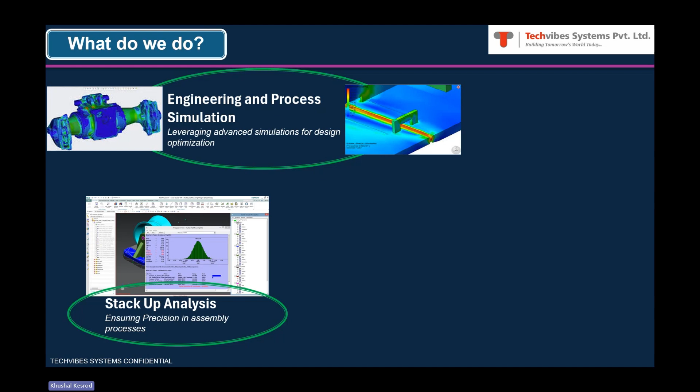And the third area in which we work is production process optimization. The first two things, engineering and then tolerance stack-up analysis, that's validation of an assembly. After it is done, once you realize the parts and assemblies, we just want to check from a quality control standpoint, part wise or maybe assembly process wise. So for that, we have a couple of hardwares and a software which address these requirements.

So a quality management system, under which we have not only hardware and software for measurement and collating data, but to even get a statistical process control document, which can basically help us understand where our processes stand.

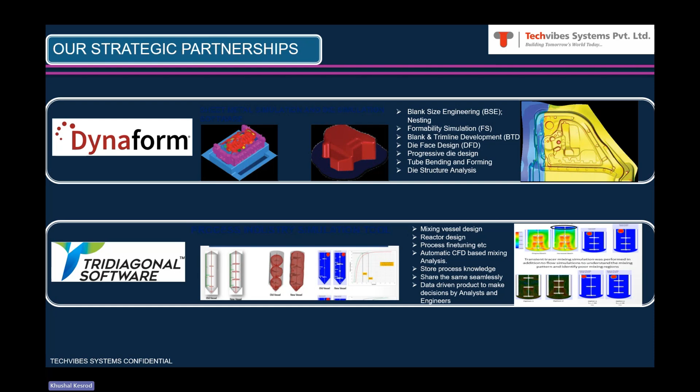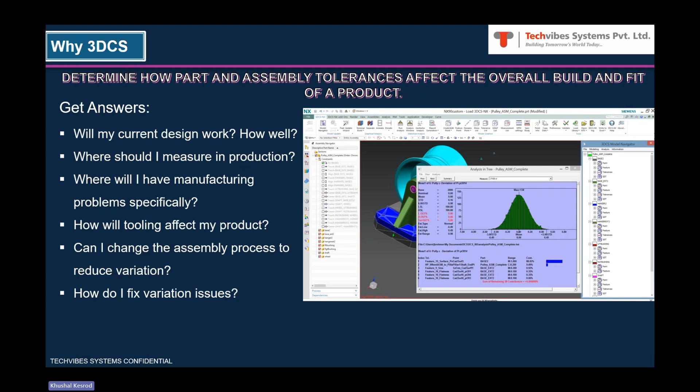All right. So 3DCS is CAD-based tolerance and process analysis software, which can be integrated into any of your CAD platforms like CATIA, Siemens NX, PTC Creo, SolidWorks, and so on. In case you don't want to use 3DCS within any of these CAD platforms, we have a CAD-neutral standalone version called 3DCS MultiCAD. Because I don't have any CAD platform available on my laptop, the demonstration that I'm going to do is on MultiCAD only.

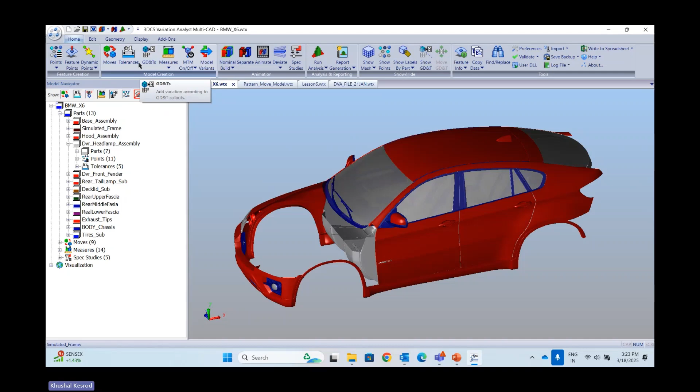Once that import is done, in order to build your model for doing tolerance stack analysis, you are only supposed to define some of the things like moves, that is nothing but assembly relations, tolerance and GD&T, and measurement. Measurement is the measurement that I showed you earlier, right? The gap between turn lamp and headlamp is the measurement requirement. So once these three things are done, your problem is ready to solve. So pretty few things only. This is just to define your problem.

And if you look at GD&Ts that we generally follow, you can see almost all the types of GD&Ts that we generally use. One minute. Okay. So you can have a look at the different types of GD&Ts that you're allowed to give here. I'll probably use some other model so that my system does not get slowed down. Okay. So you're able to define datum, size tolerance, position tolerance, surface profile, flatness, perpendicularity, as per ASME, all these GD&Ts that people apply.

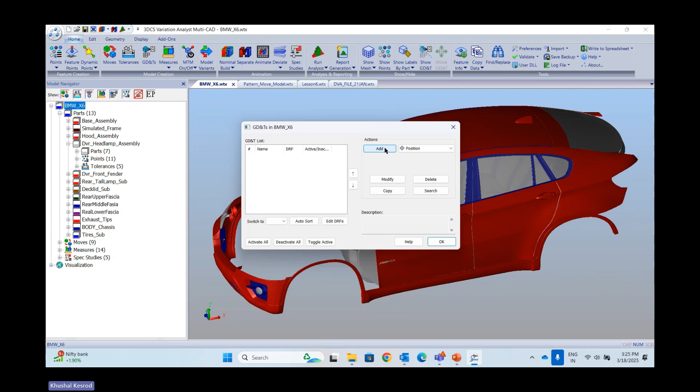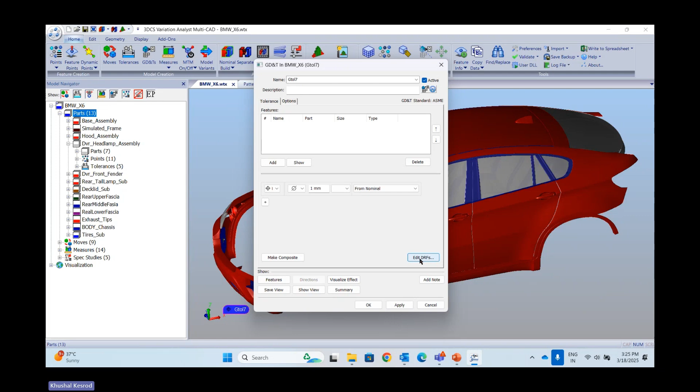Now, typically, if you get in any of the tolerances, let's say position tolerance, since I had selected the topmost assembly, it is taking much more time. So anyway, we just need to mention the feature, mention what is the tolerance level. If you have minimum material condition or maximum material condition, you can mention that, and you can mention the datum frame, like ABC or AB, whatever number of datums you want to define for that particular frame. To explain these things, I'll be in a simpler one so that it takes less time. So these are the things that you will be able to define.

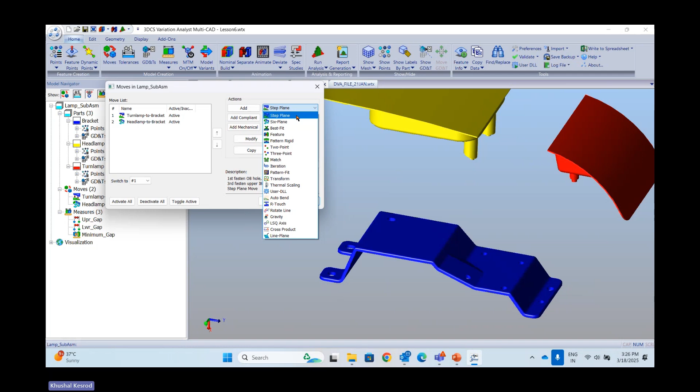Again, when I say move, that means the relation between the components, right? For example, in this particular assembly, these are the flat surfaces of the pin which go on the flat surface of the bracket. That is the primary relation. Then these cylindrical pins go in the holes on the bracket. That's how the assembly is happening. So there are different types of assembly methods. Most of them, which are very frequently used, define our assembly based on the 3-2-1 principle. I'm sure you must be aware of that. What it means is the first relation helps us lock 3 degrees of freedom, then 2, and then 1, so that the assembly is fully constrained, kind of.

Okay, so that is how the assembly relations are given, and then you can define measurement. For example, you have the facility to define point-to-point measurement, surface-to-surface measurement. You can as well define any point location, to understand how much it is varying, and so on. Angle, clearance between pin and hole, all sorts of measurements can be defined.

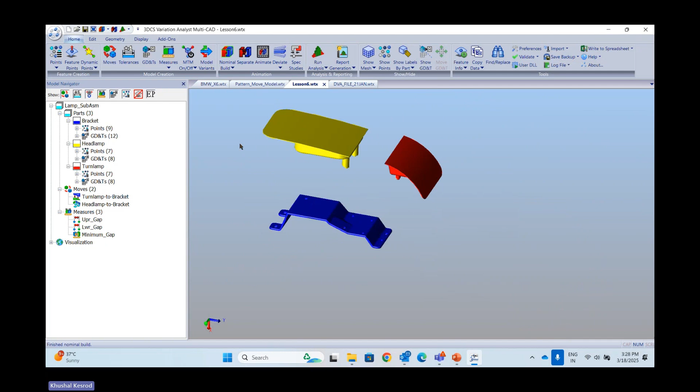Once it is done, this is just a visualization tool. For example, my nominal build assembly, after I define the relations, this is how it is getting defined. But in case of a very large assembly, you would also want to understand if the assembly sequence is appropriately happening. So you can animate and see how those assemblies are actually going to take place. Yeah. So this is just to animate that.

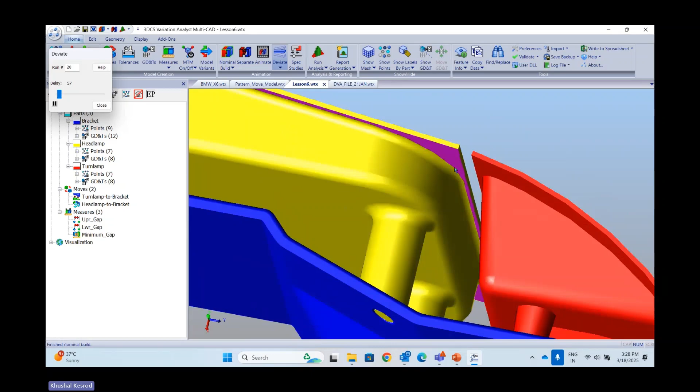And now once assembly is done, I have a choice to see how my components are behaving, how the assembly is behaving. This is just based on whatever clearances you have in the assembly relations, and whatever tolerances, for example, position tolerance of this hole and pin, profile tolerance of all these surfaces, and so on, based on which it can show you the tentative variation that can happen. However, the detailed variation can be calculated later.

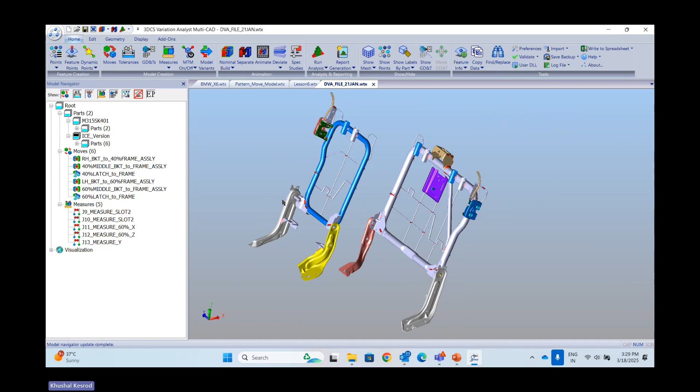Now, I'll quickly show you an example where you may require only a single assembly, but you need that assembly for different configurations. For example, this is not the right example, it is just a rear seat. But for a front seat, you will have a configuration of the seat when it is straight, or maybe reclined by 30 degrees, or reclined by 15 degrees, or something like that. So you don't have to build multiple assemblies in that case. That is where the model variants facility is there. So you can have a single assembly. You don't have to define all tolerances and GD&T in every configuration of the assembly.

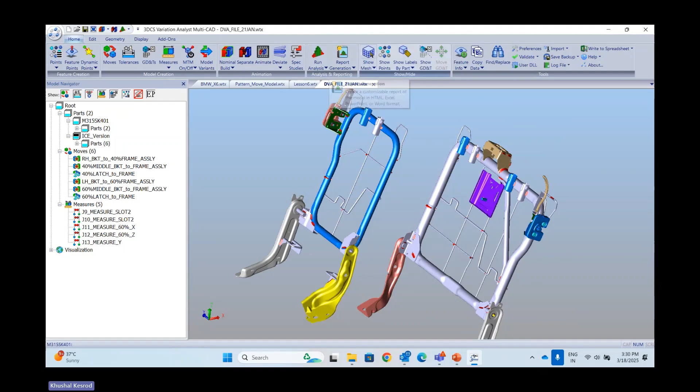You can simply create those model variants here. So that is how it is made to handle many different types of situations that we mechanical engineers face during the assembly. Okay. Now, once it is done, it is simply to solve it.

When it comes to the solver, it is Monte Carlo analysis, which 3DCS does. That essentially is a very well-known algorithm for handling a lot of permutations and combinations. For example, when I mention number of builds here, maybe 2000, 5000, or whatever number you want, it means that for every tolerance you are defining, it can make samples and permutations and combinations of those components, so it can make 5000 samples of this particular assembly. That's what it means, right?

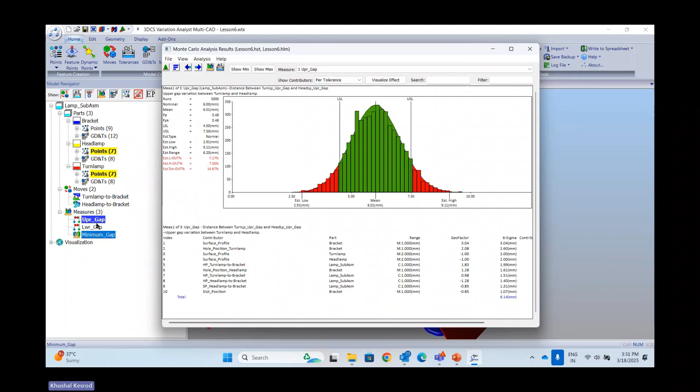So let's say if I just quickly solve it. You understand that these are the three measurements that we have asked for, and you can go ahead and start checking how my assembly is behaving when it comes to upper gap. So let us understand where that upper gap is. Okay, here. This is where the first measurement is. Okay. So what it shows now. Obviously, the nominal was 6 mm.

You were saying, the limit that is given on the lower side was 4.5 mm and the upper side was 7.5 mm. That's what it is showing. And here is the estimated one. So how low can it go when it comes to that particular gap? 2.9 is the lowest it can calculate. 9 point... I'm so sorry, 1 minute. 9.11 is the highest the gap can go, right? So what is the total variation? The difference between both of them is 6.2.

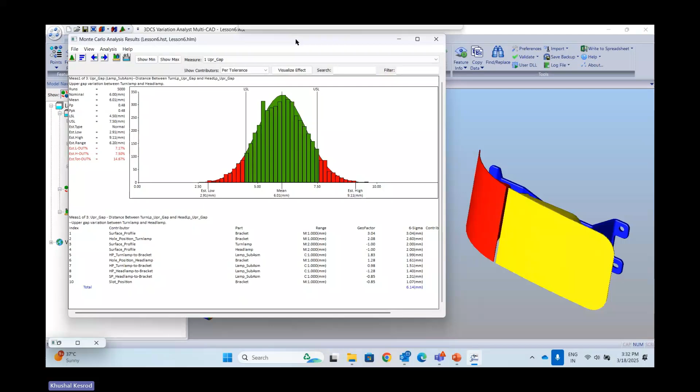And what is the percentage of samples which may go out of spec? So these are the specification limits. On the upper side, what percentage of samples is going out? On the lower side, what percentage of samples is actually going out of spec? So that is what it is showing. Now, whatever the number of samples going out of spec, what is the reason behind that? That is nothing but the contributor. So it is suggesting to us, okay, this is the topmost contributor.

It also says that surface profile belongs to the bracket. If I simply open this and show you what that particular tolerance is, that is essentially a surface profile of the bracket, which is the topmost contributor. Then it says hole position on the bracket is the second contributor. Then surface profile on the measurement surface. Yeah, the measurement surface here. So that is the third level of contributor and so on. So it suggests the sequence of contribution and the percentage of contribution happening because of that particular tolerance.

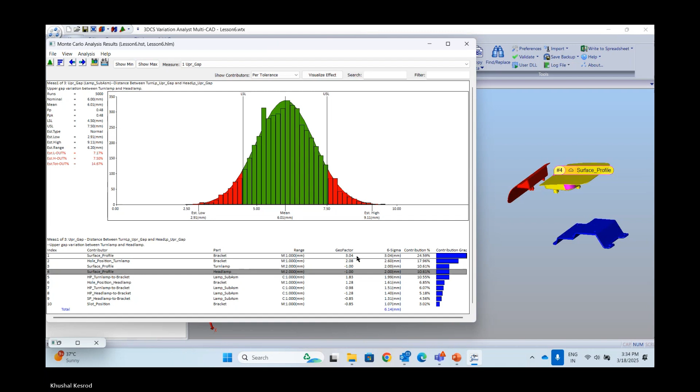Also, it shows you geofactor. Geofactor is nothing but sensitivity: how sensitive this particular measurement is to a given tolerance. For example, the upper gap measurement is 3 times sensitive to any variation happening on the surface profile. If this profile changes by 1 unit, whatever it is, 0.1 mm or whatever, the gap can change by, let's say, 3 times that variation. So that is what geofactor is, geometrical factor. Now, if this geofactor is too high, what could be the reason?

Whether my four-way locator or two-way locators are appropriately placed, or it may so happen that you

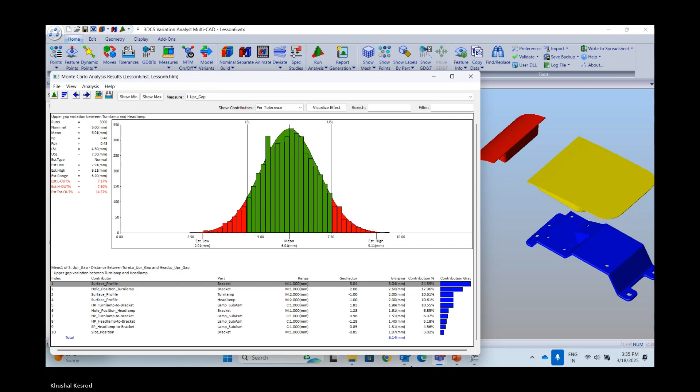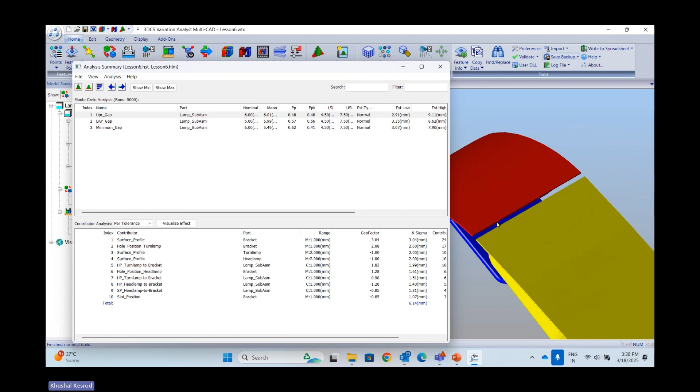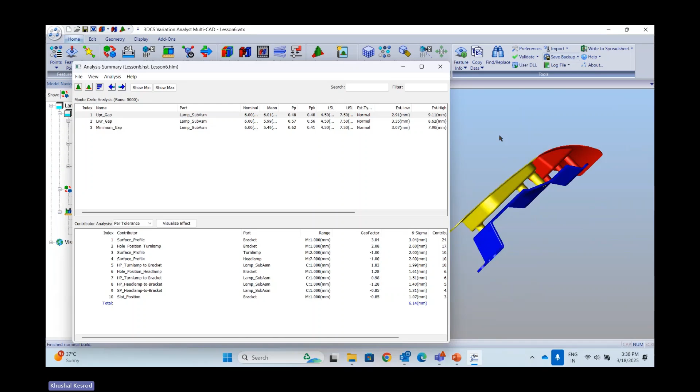now if I'm measuring over here, that is my measurement location. That is the top gap here, and my four-way locator, let's say, is very far away here. Assume that's not the right strategy, isn't it? If you want to maintain a proper gap here, this could be the best locator, so that immediately near the measurement itself, you are locating it appropriately. If this is your area of interest, then why put your four-way locator away from it? Something like that. So that is the kind of insight you get out of this result.

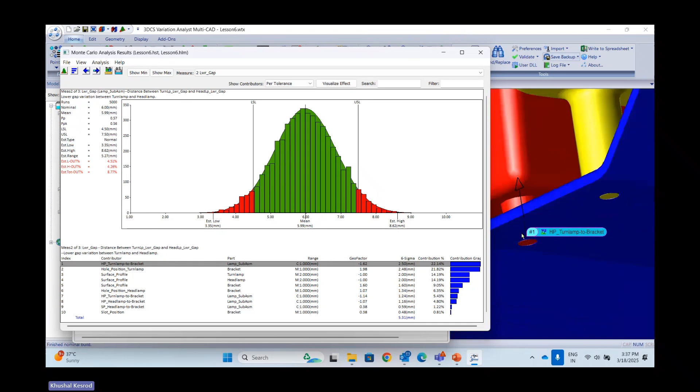Now for the lower gap, again it will list the contributors and their percentage contribution. Here, C stands for clearance, HP is hole pin. So this particular contributor comes from a hole pin relation of the turn lamp and bracket here. So that clearance is becoming a top level contributor, right?

Now, for example, here you observe around 7.5% and 7.17% of samples are actually going out of the spec. Now understand that the surface profile given is one range.

Let me just go ahead and make that a 0.5. Just experimenting, nothing else. Obviously, you will always have a choice how much you can go down based on the manufacturing process that you follow. So that's a different thing. Here, just for the sake of changing, I'm changing this value and quickly rerunning it again after making that range

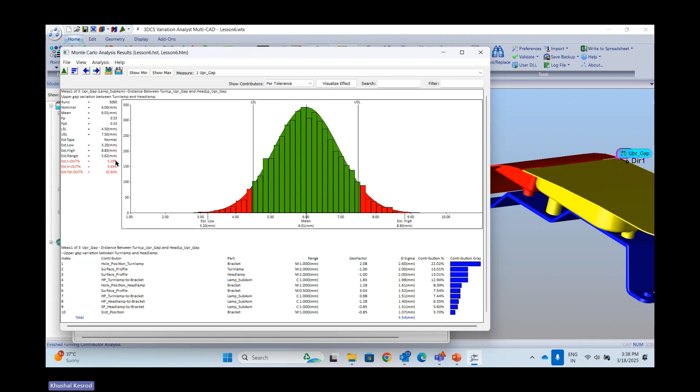to 0.5. Now, first observation: the samples going out of this spec has reduced drastically from 7.5 to around 5.2. And the surface profile of the bracket, which was contributing as the topmost contributor, is now coming at around the sixth location. So some other parameters became bigger contributors than that, right?

So that is the kind of what-if studies you will be able to carry out. Now once your analysis is done, you can automatically extract reports, generate them in HTML, Excel, PPT, or Word format. You can generate in any format, but HTML is my favorite one. I'll just create that.

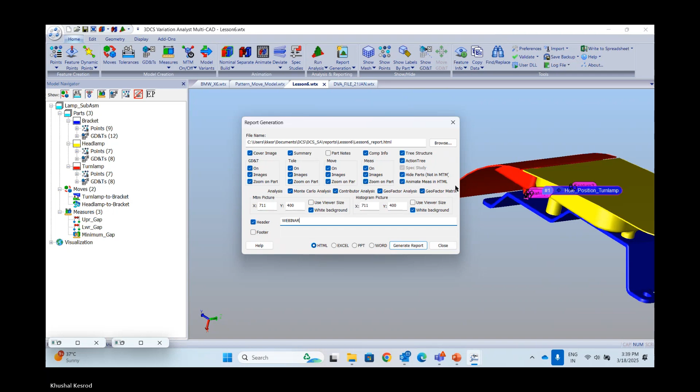One minute, let me just put it properly so it captures the image that is actually appearing on the screen whenever you do those things, right? So let me generate the report. You can always choose what to take and what not to take in the report - that's always the user's choice. And it nicely brings up the report.

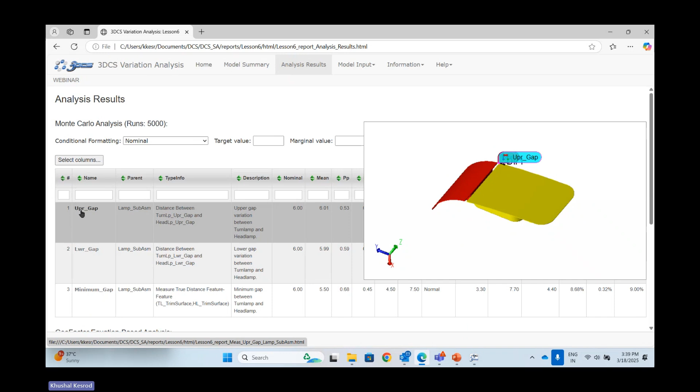If you have a model summary, it will automatically appear here as to what your model is, the reason behind solving this particular problem, and so on. You can mention that, and this is the analysis region. So we have only done it for three measurements. Where that particular measurement is, when you hover the mouse, it automatically brings up the picture - lower gap, minimum gap, and so on. If you want to see details, you can click on it.

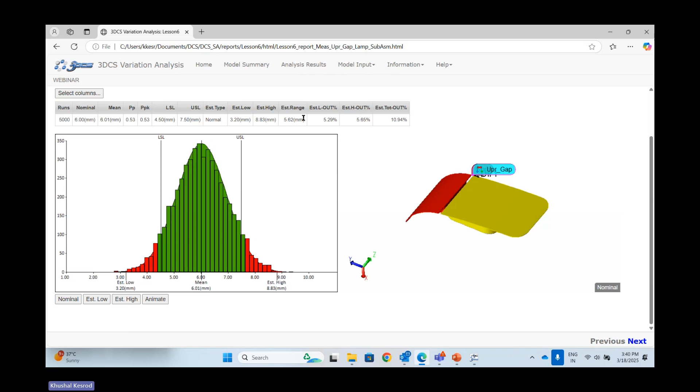You see the normal distribution with whatever percentage is out of the spec. Then you can go ahead and see contributor analysis, which will list down the contributors. And when you click on any contributor, it can show you what that particular contributor means and where that particular feature is.

Surface profile - yeah, this is what it is showing you. This is the second contributor, so you can see that in detail, right? And everything is actually linked with each other.

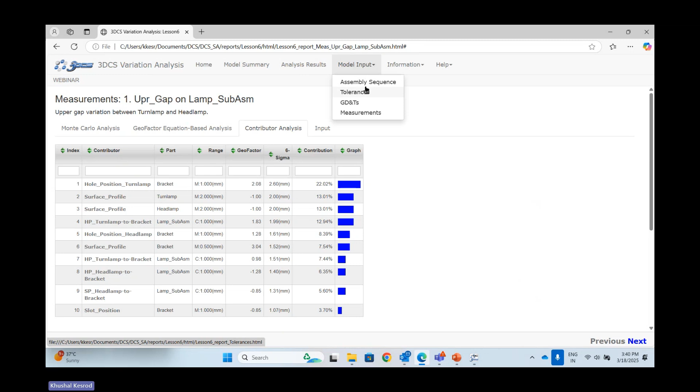Then, what was my complete model input, like the assembly sequence? What was the assembly sequence, in the sense, the moves that we have defined - Turnlamp to bracket, headlamp to bracket.

Then even the measurements - there are only three measurements, but you can see where those measurements are. All this you will be able to get in the report.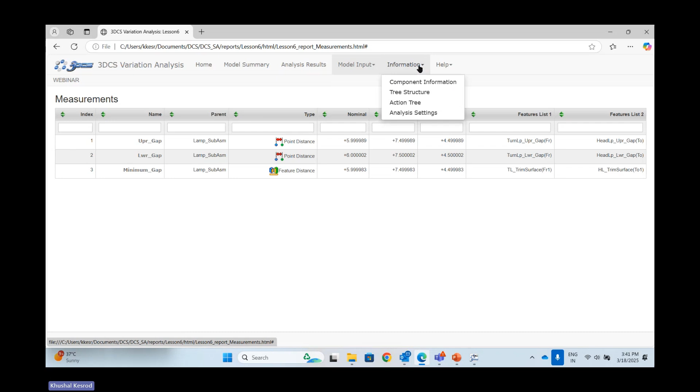As well, you can get complete component information - which components you had, how many components, how many points there were. Complete summary of the model you get here. You get a tree structure - this is pretty small here, but otherwise if it's a large model, it's very important to see the actions tree in terms of GD&Ts, datum and size tolerance, and component-wise, every component you can get in tabulated format.

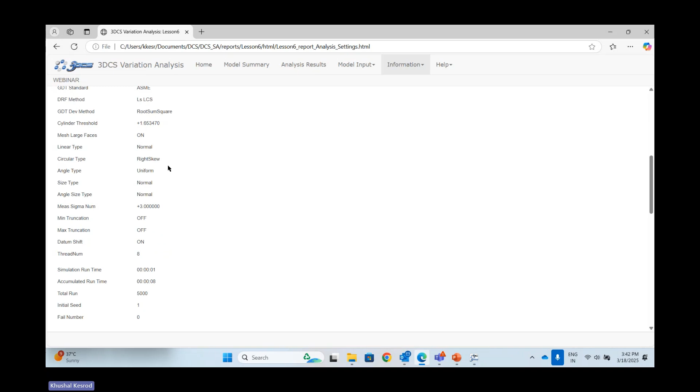And finally the analysis setting, where your input file was, what the summary was in terms of number of parts, GD&Ts, and so on, and all other solver details. It also provides complete simulation analysis settings, so you get a complete summary here - when it was solved, where the file was saved, and so on. So you get the complete thing in the report.

So you actually get a very detailed report in any format that you choose. HTML basically has everything linked, so that's the format I use.

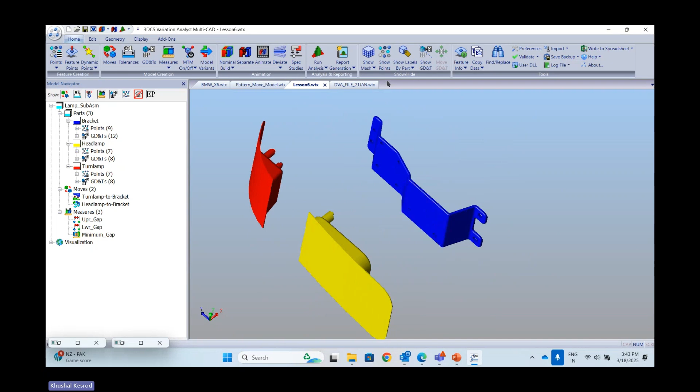Now, before I solve, I would have already defined the measurements and GD&Ts and all. I can actually view them component-wise, even when simply hovering the mouse or clicking on it. For example, this particular profile tolerance - see, it is applied on these many surfaces. Position tolerance is actually applied on these pins - holes, sorry, holes.

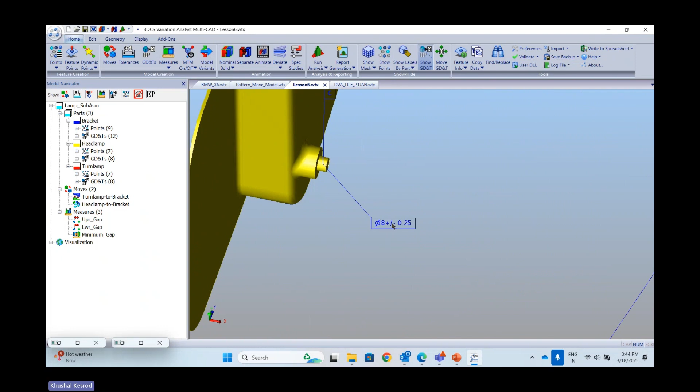So the moment you hover the mouse onto it, it can automatically highlight where this datum is applied - to this hole, size tolerance is applied to this hole. This particular pin, the size tolerance is applied, and position tolerance is applied. So that is how it is when it comes to validating the model.

Hey, hi Khushal, Yogesh here. Sorry to disturb you, maybe you've been talking for some time now. I would like to ask the audience if there are any questions, or if there's anything you would like to see again. Just to make maybe a half a minute or a minute break. Yeah, okay.

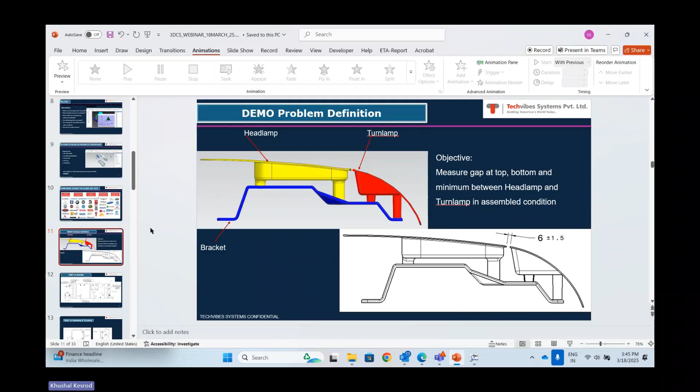So this was one of the demo examples that I wanted to show you. Obviously, these were the GD&Ts that were defined on the model.

Mr. Nrupat Yadav has raised a hand. Just a moment, let me unmute you. Hi, I'm Khushal. Hello sir, can you hear me? Yes, I can hear you. Khushal, there was a mock drill so I joined late, can you quickly brief me from the start, what you want to understand?

In short, this is how we can use it, which software it is compatible with. Okay, perfect, I hope so. No problem, but please, I'll just borrow a couple of minutes from other participants and quickly brief you.

So this is basically a dedicated tolerance stack-up analysis solution. It can get onto any of your CAD platforms like CATIA, Siemens NX, PTC Creo, SolidWorks, and so on. It also has a CAD-neutral standalone version, which is what I am actually using when doing the demo. So it fits equally well into any CAD environment, and beyond.

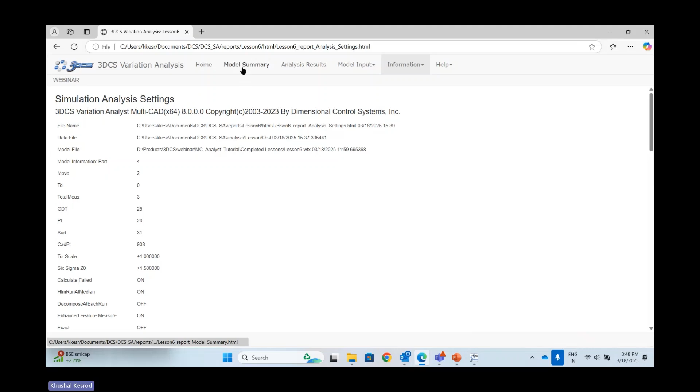Hope you got a glimpse of it, right sir? Yeah, right, okay, in the interest of time, otherwise you can reconnect with us anytime, sir, we can have a detailed discussion. Okay, all right, of course.

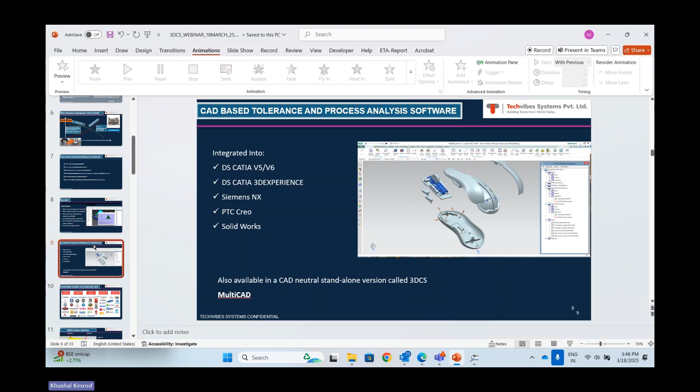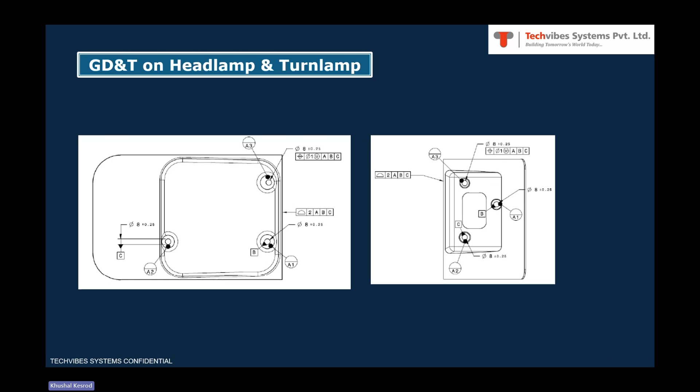Not only GD&Ts and tolerances, but you will be in a position to use even the constraints that you have given in the assembly. I will just quickly show you an example.

Anyway, before that, you have already seen the typical output that 3DCS provides. It does Monte Carlo simulation. It provides quality metrics like PPK, CPK values, which make you understand where your process stands, and key contributors, by which we understand which GD&T and tolerance are contributing to variation.

Looking at percentage out of spec, you can decide whether it's an acceptable percentage or not, depending on the assembly you deal with. What is the total range of variation it's showing? If it's acceptable, it's okay. If not, what needs to be done based on contributors and their sensitivity? You can do a what-if study. Geofactor is nothing but sensitivity, in simpler language—how much the part geometry contributes to the product's variation is what geofactor means.

I'll quickly show you a demo in NX. This is the NX environment in which a simple assembly is imported. When imported, you can see the tree in 3DCS is simple—they are only parts, so there's no tolerance, no moves. You can see on top the same set of icons you saw in multi-CAD. These are the parts in the assembly.

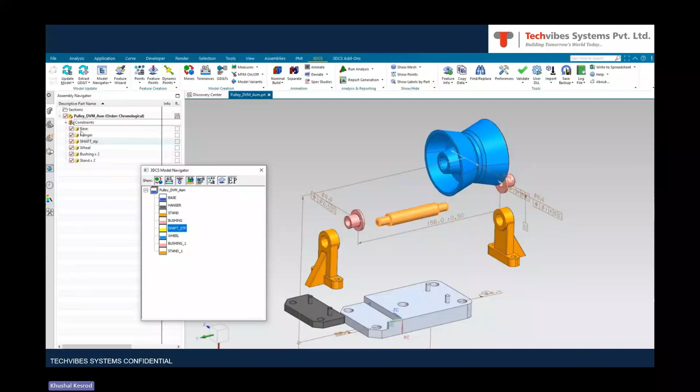If you look at the screen, you have all the GD&Ts and tolerances defined in the NX model. I've expanded the tree and shown you this is how it is. Every individual component also—if you go into the component level and see, yes, all the GD&Ts are actually defined. So here it's very simple.

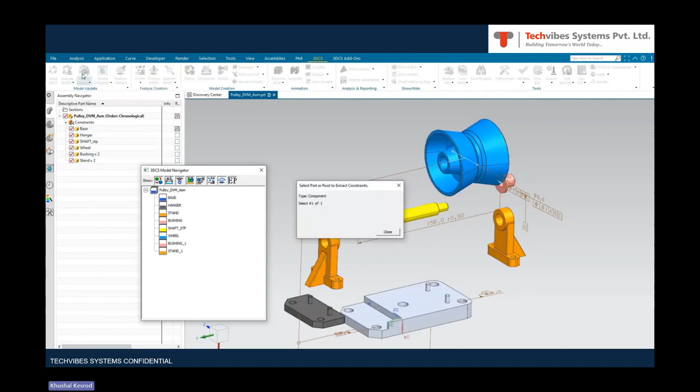We can update the model once before bringing in all the PMIs defined in the NX environment. Here—extract GD&T, can you see extract GD&T? Let me update the model first, and I'll say extract GD&T for all components. I'm choosing top level and said okay. No, this is not extracting GD&T—this is basically defining the moves. So relations defined at the assembly level, like mating, hole-to-hole axis alignment, and so on, it brings that as a move. However, you can always make changes to those moves later. You can see the animation of how moves are getting defined.

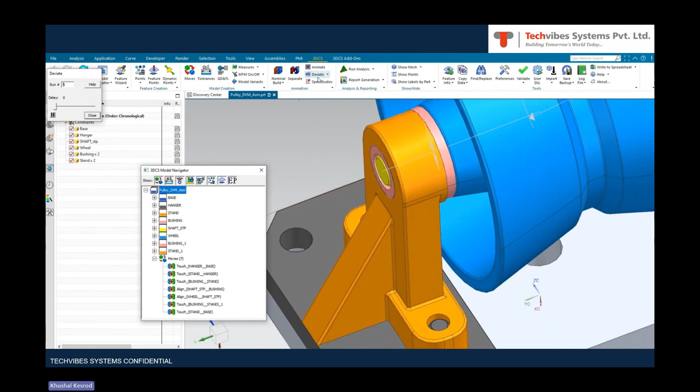The bush and the bracket got onto the base, and this is the complete assembly that is made. Now, as I explained, move, GD&T, and measurement—out of which move is already defined. Let me fast forward in the interest of time. Here we'd like to extract the GD&Ts automatically from the PMIs defined. If you expand any component, let me sort them automatically so datum, size tolerance, and all other tolerance types come in sequence properly—A datum, B datum.

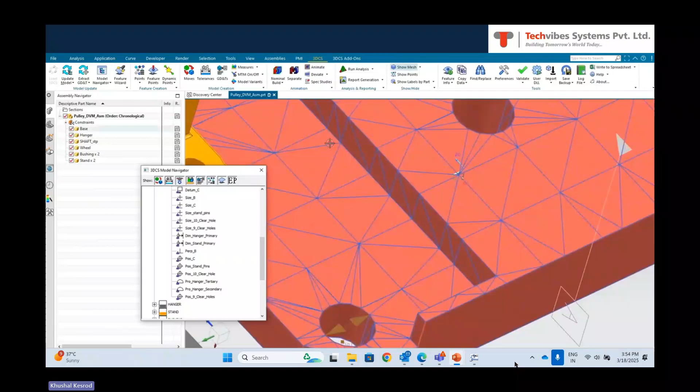This process has extracted the GD&Ts from PMIs defined in the model. Now that the GD&Ts are defined, you can see a profile tolerance applied on this particular surface. Let's see the variation at the surface level. Because of the profile tolerance defined here, the surface is varying—to visualize that, I've made the mesh on. After defining the relation between parts and the tolerances, this is the tentative variation—the model basically breathes, this is how it's breathing. And then you can solve it.

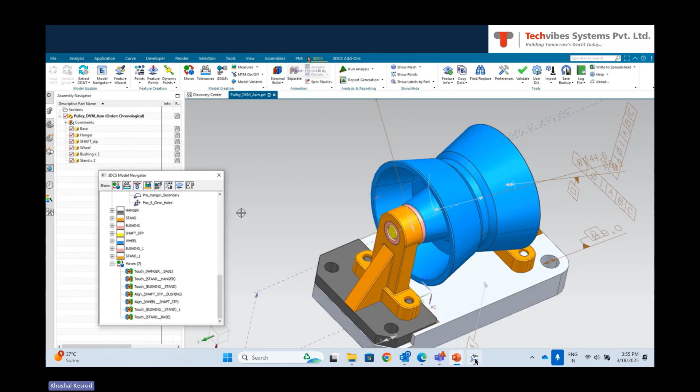That's how simple it is in a given CAD environment. However, even with the multi-CAD version of the software, you'll be able to import this information—GD&Ts and moves. These are the modules of the software, and what we've seen is Variation Analyst, the topmost one. But there's also a small, simple module called Design Variation Modeler, which is kind of a replacement for the quick 1D stackup people do. It should be used by the majority of engineers, and then a specialist GD&T person can go for VA, Variation Analyst—that's how the functionalities are bracketed.

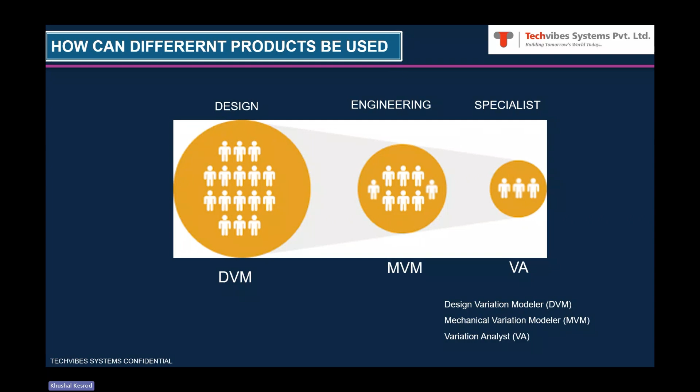This is what I wanted to show: DVM, Design Variation Modeler, can be used by designers quickly for each and every sub-assembly and assembly you deal with. Then the engineering team, where you have mechanisms to deal with—Mechanical Variation Modeler—can be used when you have kinematic joints involved in the assembly. And VA is the specialist tool where you can do a detailed tolerance stack-up study.

We have a couple of add-on functionalities which can also be used, but they are add-ons to Variation Analyst to handle certain situations. Just as an example, this FEA compliant modeler essentially accounts for deformation in parts—because of deformation, the measurement may be less accurate, so you don't have to worry once you use that as a flexible component. Over-constrained assemblies, parts deforming, having more than three primary datums, clamping sequence, welding, spring-back issues, gravity—all these situations, you can use FEA compliant.

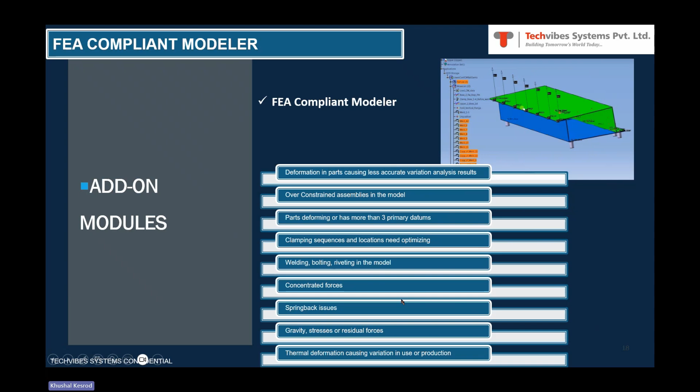So this particular example you can easily understand. Now this hood or bonnet, being a very large component, you can see because of the gravity itself the portion is a little bit bending. It's exaggerated in actually showing that, but that is how it goes. So obviously, because of the self weight, the gaps that we are measuring across the length of the hood may not be uniform.

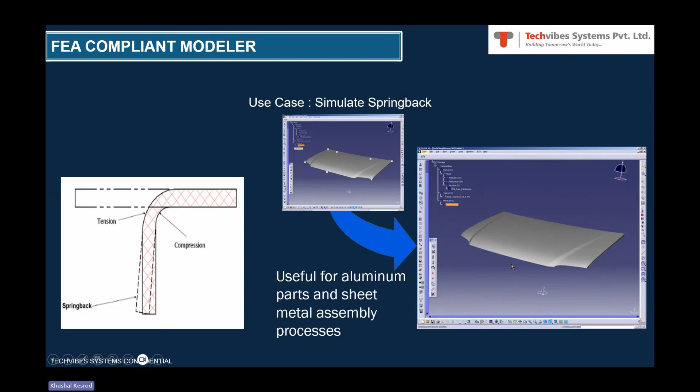So how can we control that? First of all, to accurately measure the gap, this component needs to be considered as a flexible component. That is where FEA Compliant comes in. Sometimes when you are fixing components on fixtures for welding, you are clamping them, and after you remove the clamp, obviously it springs back. How much spring back will happen? All those you will be able to see.

This is another example of gravity itself. So if you just snap this rear bumper at both the ends, left and right ends, and maybe a couple of snaps in between, still because of its self weight, the gap you will see will be different. In the middle it is definitely going to be larger compared to what you measure on either end of it.

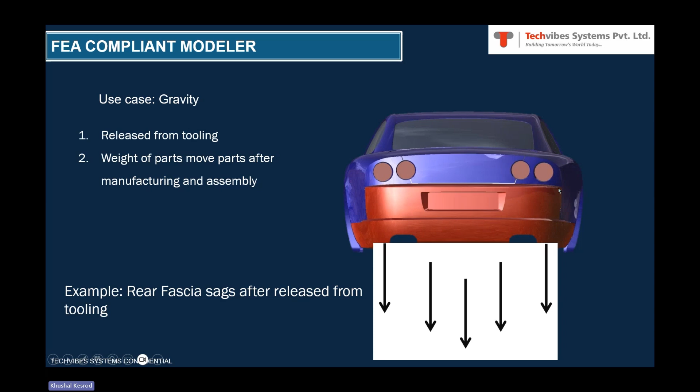Sometimes thermal. In any situation you measure the gap, you may find it different because of the thermal environment. All right, so in the interest of time, I am not going to show you all the add-ons that we have, but yes, depending on your requirement, we can explore them further.

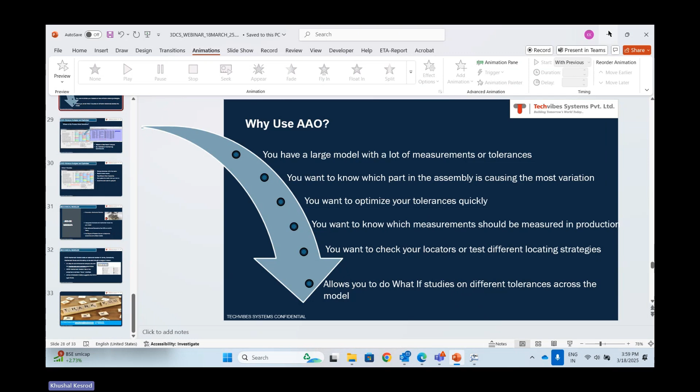Just to show you examples of practicalities that you want to consider in the model, like the type of moves and the assembly sequences that you were seeing, primarily, even when your pin distance and hole distances are not matching, all four holes have to be somehow assembled; that is what practically happens. Then you can use a move called pattern move, right? It overwrites the primary move, and finally the pattern move will be used for the solve. That is how all types of assembly relations are defined.

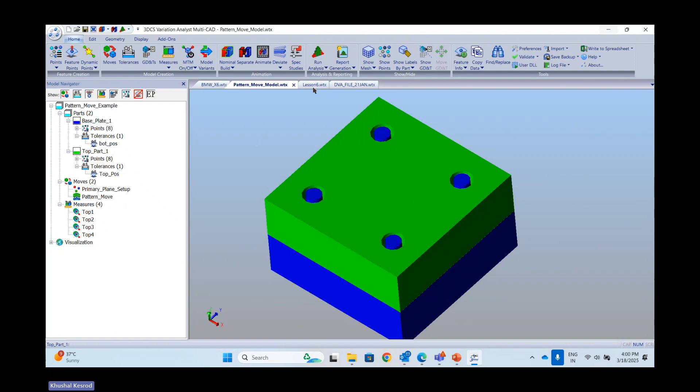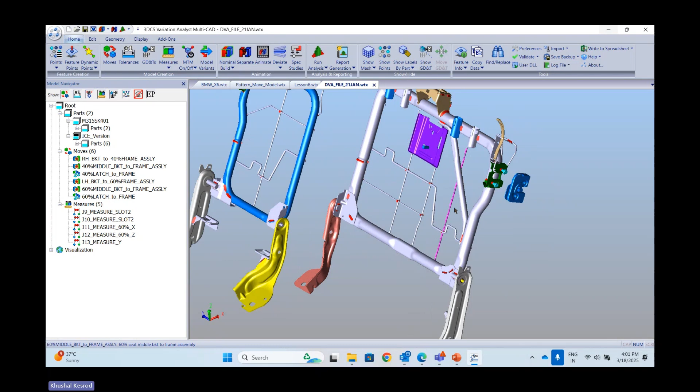And for any size of assembly you want to capture variations in, you can take into account different assemblies and sub-assemblies, not only in automotive, but elsewhere as well. So if you look at this main assembly, there are a lot of sub-assemblies, the bracket going onto it, another bracket going onto it, and so on, right? So that is how the assembly is taking place.

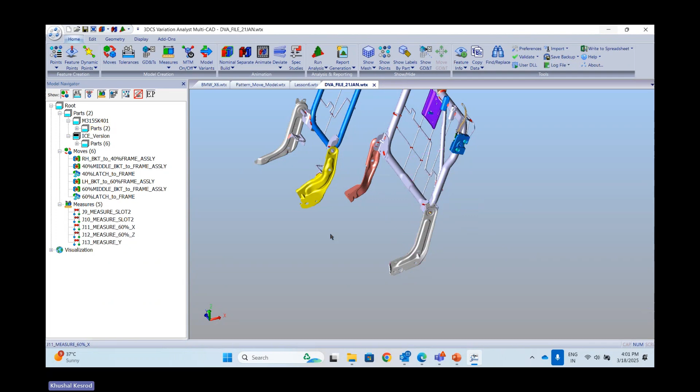Once it is done, whatever your measurements are, like my measurement here is the distance between these holes, distance between these holes, and the vertical distance between the hole where the latch is coming and the base. In short, when we assemble this onto the vehicle floor, all other locations I'm supposed to reach, I should be able to reach. Otherwise, it does not make sense.

You install this seat assembly on the floor, and when you start latching it, the latch pin is elsewhere and not coming here. In order to ensure that, we have to ensure that the variation between the floor and this particular pin location remains within the tolerance, so that I'm able to assemble them. That is the exact purpose why people use tolerance stack-up analysis.

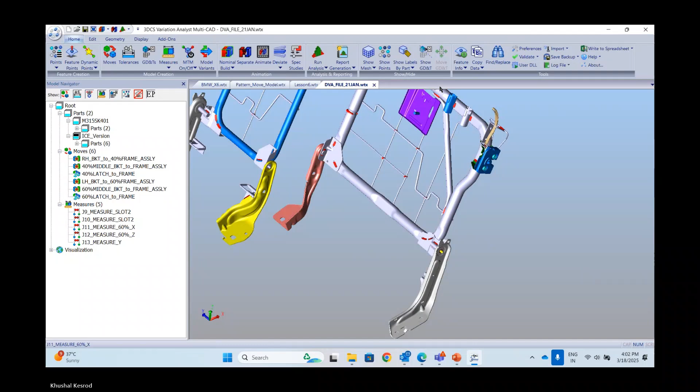Yeah, I'm done with it. If you have any questions, you can ask me now. Hi Khushal. Yeah, tell me. Can you show one example calculating the worst case scenario for any dimension you already have? Right.

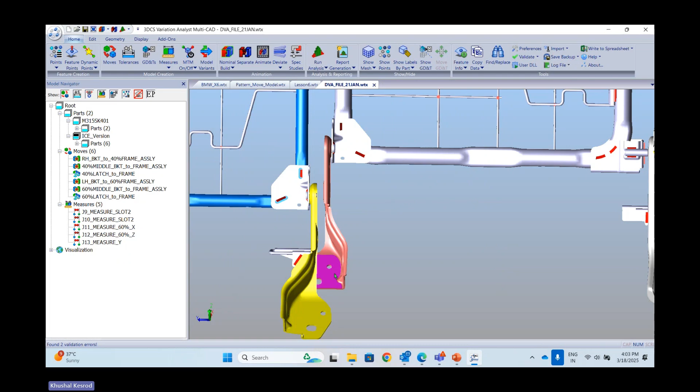Okay. Obviously, this variation analysis essentially does Monte Carlo simulations, with what we call normal distribution, Six Sigma, things like that. Worst case is generally when you measure things manually. For example, here you build the loop, right? For this measurement, first, the distance between this bracket and this thing, then outer bracket to outer bracket, and then this outer bracket to this particular location. That is how you build a loop.

Correct. And you go all plus for the worst case on the plus side, all minus for the worst case on the minus side. That's how you do it. That also can be done, but that does not serve the purpose. Basically, if you go with worst case analysis, a majority of the times the assembly that you reject may not...

We can't hear you, Khushal. Yeah. But yes, the answer to your question is it is actually possible. Khushal, we lost you in between for 5 seconds.

Oh, is it? Okay. Yeah. So what I said is, worst case scenario is something that we will not be interested in, but yes, in the solver you will be able to do a worst case analysis also.

So the worst case scenario means that is exactly completely worst case. And in this you have a different Monte Carlo method. Correct. So we can get both the values, like Monte Carlo method, how the variation will come, and the worst case scenario also will be there, so that we will have both the things there. Correct.

You just give one example, like you are saying the left and right bracket. In between that you already provided the input about the geometrical tolerancing. If you have this or another example, then that will be better. Okay. Worst case definitely will have different results.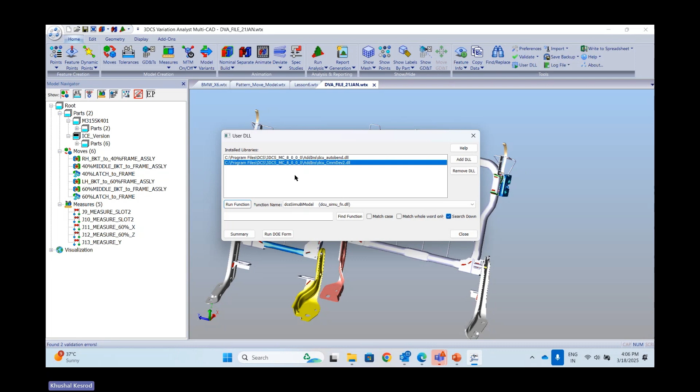I have not carried out worst case analysis here, but we have a user DLL for carrying out a worst case study. We need to check the appropriate DLL for that and solve it. It can provide you a worst case study. However, for this particular assembly, or any assembly for that matter, we have already solved this, so I will just show you results for this as well.

So for each measurement we have a normal distribution within plus minus 3 sigma, that is total 6 sigma. What it shows is the gap, which is currently 6 mm nominal in the assembly, can go as low as 3.2 and as high as 8.83.

And when it is varying this much, which are the contributors to this variation, and what is the percentage by which they are contributing. It also provides you this sensitivity. This is the Monte Carlo method calculation, right? In worst case scenario, it can go more than this. Correct. So 1 minute, more or less.

Huh? Anup, hello, Anup is there?

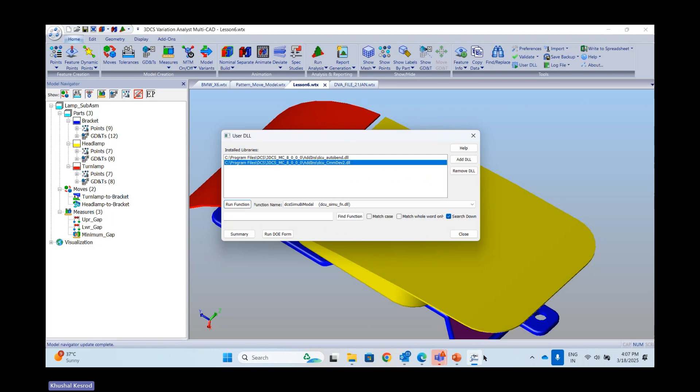There is a straightaway quick run for worst case scenario which we can run through the DLL. I can show you that as well, sir, the difference between Monte Carlo simulation and worst case. Once you have this, you will not be using worst case. But for your information, the way you calculate the loop and get the worst case result, you will be in a position to get it in 3D also.

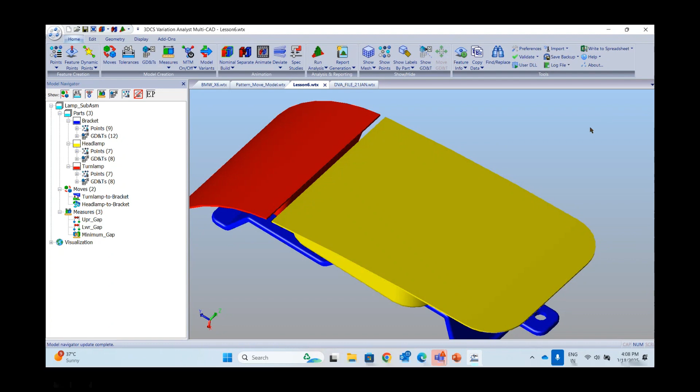Okay. I just wanted to see the complete loop, this 6 nominal and the worst case, and which geometrical tolerances are considered in that. First of all, since it's a 3D model, we have defined GD&Ts on the part level, wherever we have defined it.

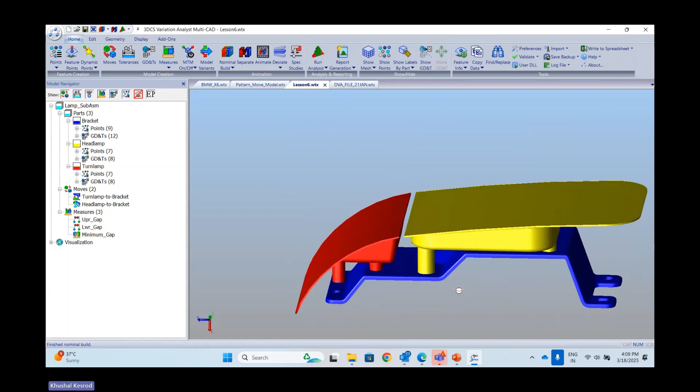Now, we don't have to really worry about what GD&T it is considering when it is measuring this particular gap. The software will automatically define that. Some features, for example this oblique feature, will contribute to flush as well as gap, because it is oblique. It can contribute to gap, that is horizontal, as well as flush, that is vertical difference, this particular oblique surface alone.

So when you make a manual loop, it becomes very difficult to consider the sine and cos component of this particular factor. Am I right, sir? So the yellow and red parts are both going to assemble on the blue bracket, correct.

So in this, you have the screwing feature on the bottom side, or guiding? Guiding is not there, I think directly screwed. It is just a guiding feature, or whatever you consider. Okay, so the guiding feature variation is also considered in your calculation.

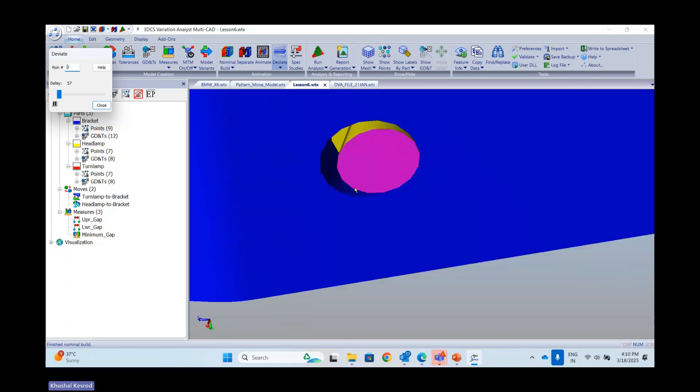Perfect. So any tolerances, if I just have to show you the simple dimension deviation, any deviation that you have between hole and pin will also be taken into consideration. Plus, because of the profile of the surface, whatever gap is coming, that is also getting counted.

Not only that, it is not only about the clearance between hole and pin, but about the position of this hole and the position of this pin. Tolerance variation of all of these pins and holes, exactly. Now, when we list the results, you can understand based on the contributors which are the most contributing in that particular case.

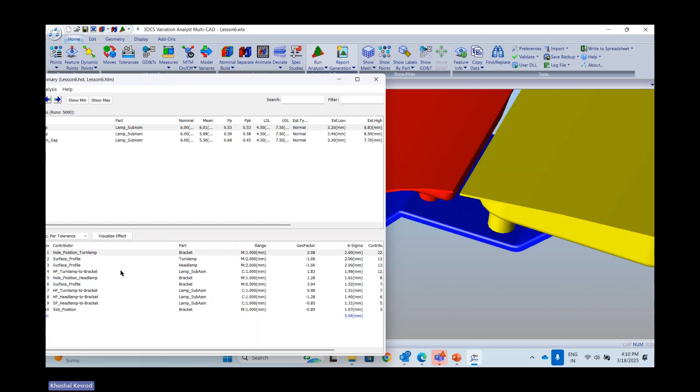Based on the contributors, you will understand how it is basically making the loop, right? So this is hole position. Hole position on the bracket will definitely impact the gap, isn't it?

Then surface profile. Surface profile means this measurement surface only. So any profile tolerance that you're applying on the turn lamp, and surface profile applying on the headlamp on this particular surface, is directly contributing to the measurement, 1:1, right? Yeah, clear. Correct. So that is how it takes. So you don't have to worry about how the loop is going to come.

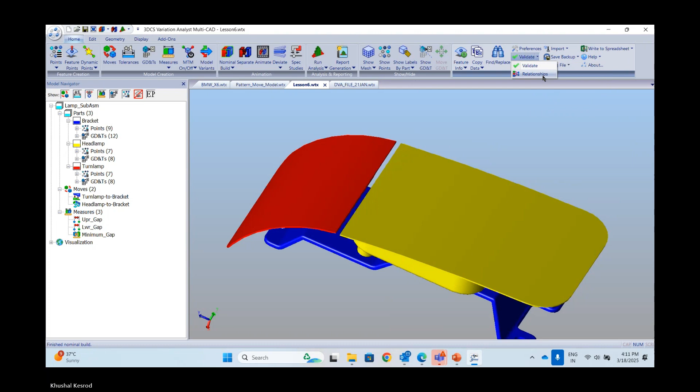In case it is just on us, how correct we are providing the tolerances, how right we are, using this software. So in this case, you have not defined all the tolerances and you don't want to define all the tolerances, but only what are required you want to define, then you can make use of this

relationship, wherein, let's say, some tolerance, let me remove on a particular feature. Now, any feature that you see, if they are used in the assembly and tolerances are applied, then no errors. Tolerances are applied but they are not used, no problem. That is not a bad situation to be in. But any feature which does not have a tolerance, but is used either in a move or a measurement, will highlight red, so that you think there is something missing in it, right?

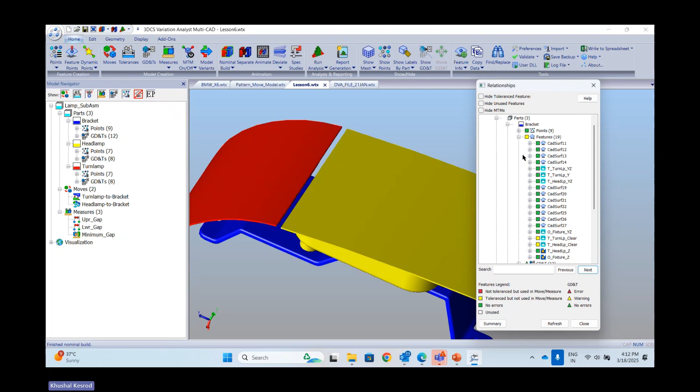Example, this particular hole should have a position tolerance, right? So let me just remove it and refresh. It shows this feature is used, but not toleranced. It's simple, right? If you are using it in assembly or in measurement, that is not going to be an ideal feature. It should have a size or a position tolerance defined.

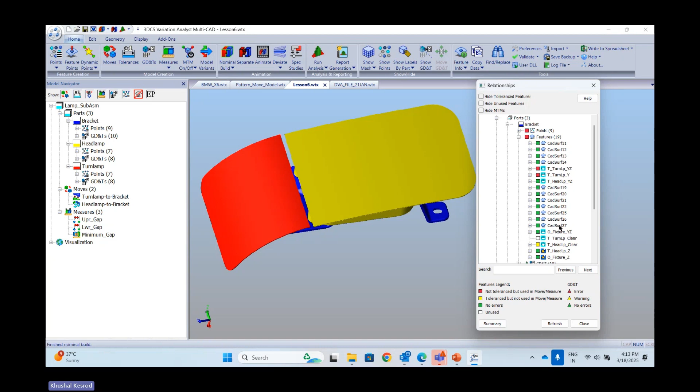So once you go through this relationship, you will automatically understand, for a given model definition, if there are any missing things, and you will be able to validate them quickly. That is when you have not defined all the tolerances in the model and you just want to take up what is required to start with. Then this is a good way to see. I hope you understood this point.

Yeah, understood. So this environment is completely for 3DCS. Correct. So we can import CATIA, UG, any file here, or a STEP file we can also import. Yes, I'll just show you the formats.

So you have obviously all primary CAD formats like CATIA, UG, ProE, SolidWorks, as well as neutral formats like IGS, STEP, JT. You can as well import, for example, if you don't have a CAD model and you have a scanned file.

Hello, Khushal sir. Hello. Vishal, we are losing you in between. Hello. Yep, now it's okay. Anyway, you were asking for Anup, Khushal.

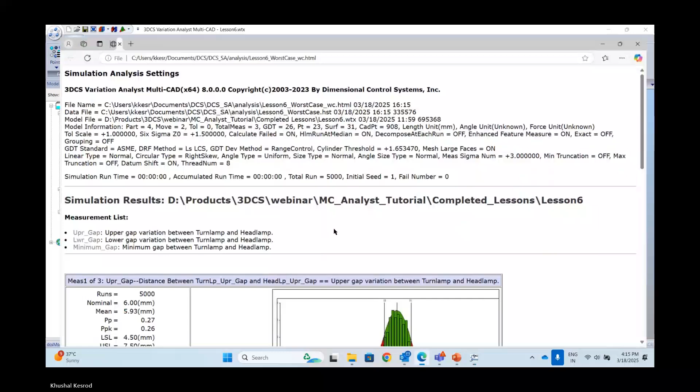So it automatically shows here. One minute, I just forgot, Yadav sir. Yes, Khushal. So I've just carried out the worst case analysis, which automatically shows the report as well. The estimated high here is 10.97 and the lowest is 0.97. So this is worst case analysis. The range is 10 mm.

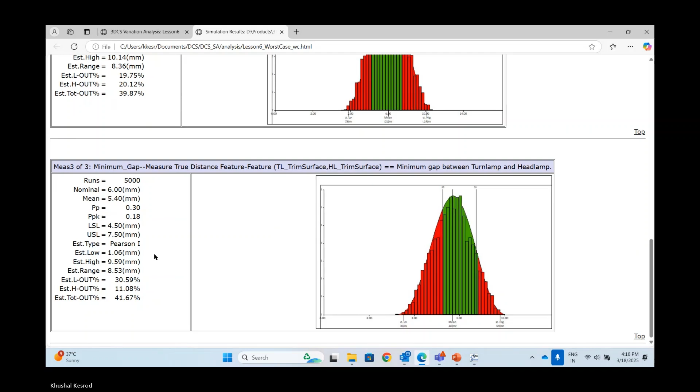For this measurement distance, this value may change because you have deleted something. Correct, maybe possible. It may not be as big a difference as what you see here. Yeah, I got it. So this worst case feature is available; we can get it from here also.

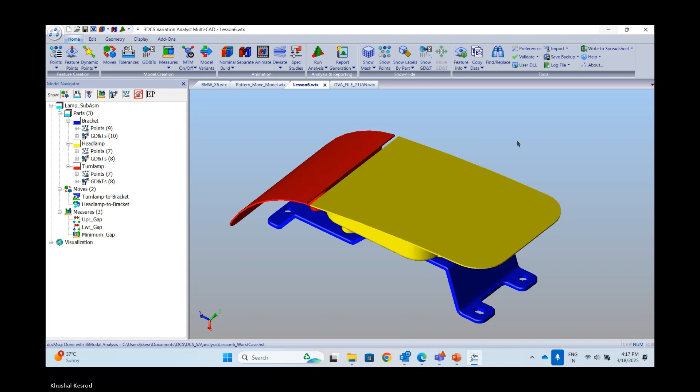Because sometimes we don't have any choice, we have to go with the worst case analysis only. Okay. Yeah, you can do that, not an issue, sir. So that is related to the severity only. If it is less severe, we can go with the other method.